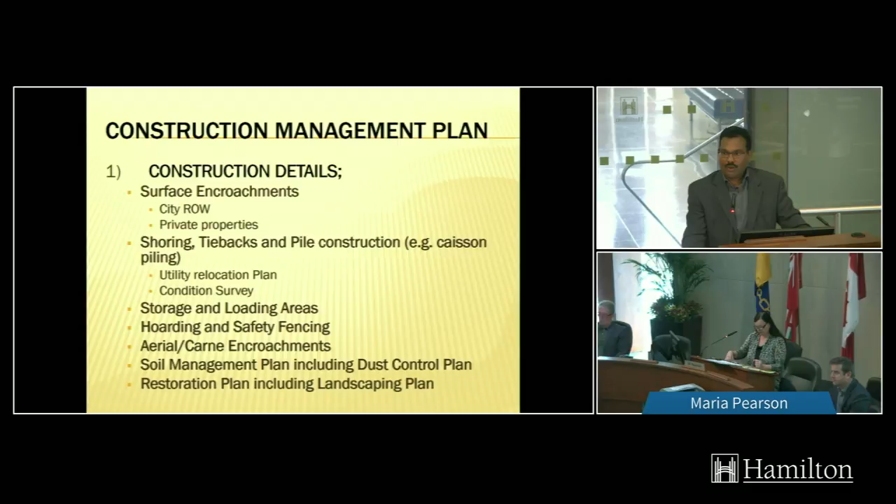Number one, the surface encroachment. What is meant by surface encroachment? There are two components we would like to discuss: one is the encroachment to city right-of-way, and secondly to the private properties.

Then I would like to present on the shoring, tiebacks, and pile construction - what is actually required for the applicant to submit to the city. Then we would like to talk about the storage and loading areas, hoarding and safety fencing, and we will discuss aerial and crane encroachments, soil management plan including dust control, and the restoration plan including landscaping plan.

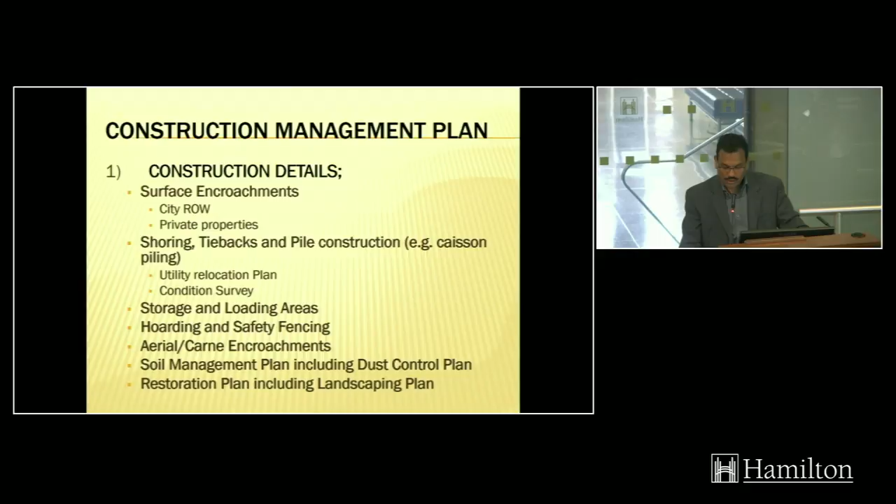So I just wanted to give an example of the surface encroachment. If you look at this map, you could see all three sides of this property surrounded by the city roads, and to the north and east side of the property, you can see there is private properties.

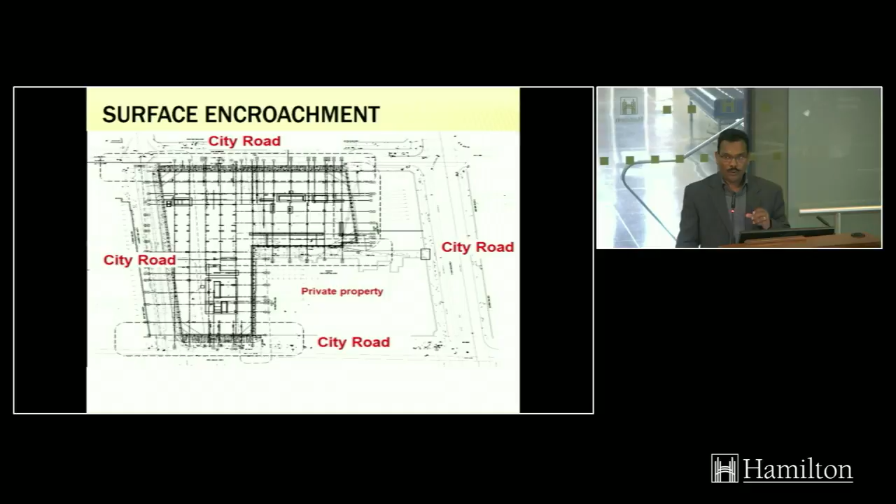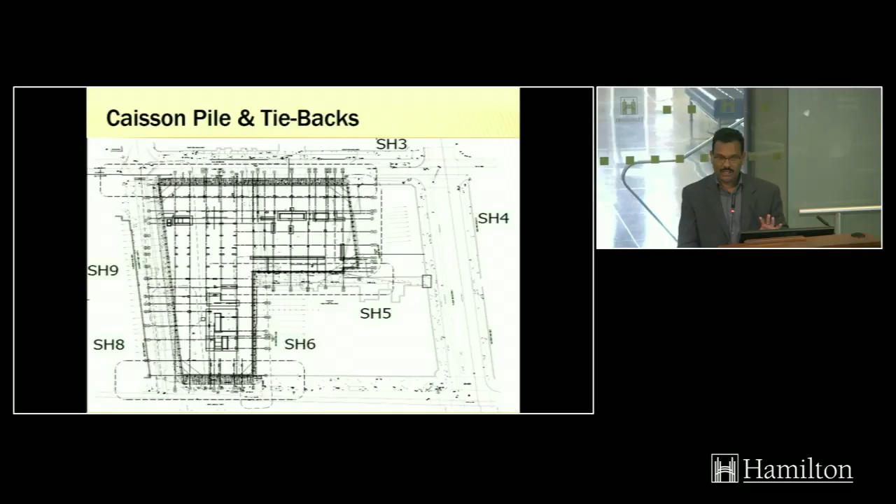So what we can see from this drawing, the applicant is proposing caisson walls, and also doing excavation within the city right-of-way. So in order for them to do the surface encroachment, I wanted to show you the next slide - the applicant has to submit a drawing with different cross sections, and they have to articulate how they are going to construct this building.

So if you look at this caisson, pile, and tiebacks for this particular project, you can see that the applicant is proposing to install a caisson wall. This is the caisson wall, and this is the foundation wall. They are proposing to have 4 levels of underground parking, and this is about a 25-story building.

Let's look at what is the impact and how we can address the impacts to the city right-of-way and the neighboring properties. If you look at this line, that is called the tiebacks - the applicant is proposing tiebacks to the city right-of-way and to the private properties. If you look at this block, that is the city infrastructure such as water, sanitary, storm, and so on, and the blue dots show the utilities within the right-of-way.

So we are asking the applicant to demonstrate - first of all, the city may not support the installation of the tiebacks within the right-of-way. They have to identify all the alternatives to see whether they can construct the building without impacting the city right-of-way. If there are no alternatives, they could come up with a design called shoring and tiebacks, and look at how they can implement this.

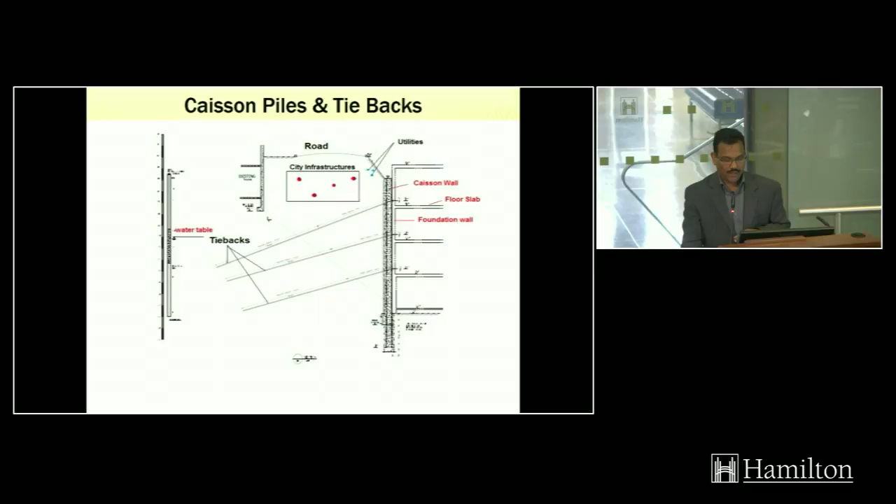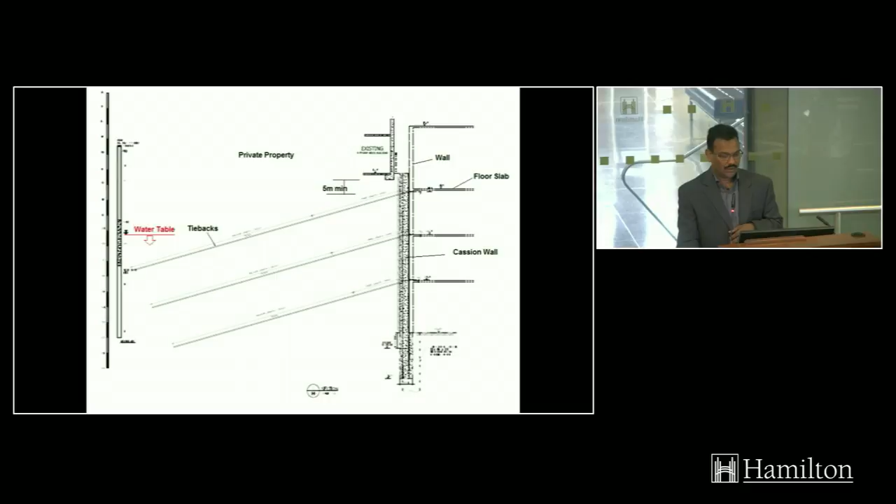One of the applications is also proposing tiebacks to private properties. You can see here, this is the existing building, and this is their foundation - they are going underneath the foundation with the tiebacks. So as a city, we are requesting the applicant to obtain approval from the neighboring property owners and a legal agreement with the property owners before they can do the tiebacks and have an impact on the private properties. So I just wanted to talk about what is meant by tiebacks.

Tiebacks are always used, if you look at major cities like New York, Boston, Toronto. In these major cities, land is precious, so developers want to take advantage of tiebacks to reduce the cost to construct the foundation and underground parking. So in order to do that, they propose the tiebacks first.

Before they start any construction, they install caisson walls all around the perimeter, and then they start excavating. One of the conditions for the city is a record of site condition. Without a proper shoring plan in place, they cannot do the excavation. So they have to come up with different types of shoring methods to support their construction.

If you look at this map, you can see the different types of shoring they can propose. For example, if this is a caisson wall or sheet pile, they are driving into the ground, and they have to drill a hole through the surrounding land. Then they install the steel and the grout, and tie with a thread to hold the tiebacks, holding the caisson wall or whatever method they are using. Technically speaking, they are just holding the caissons into the soil.

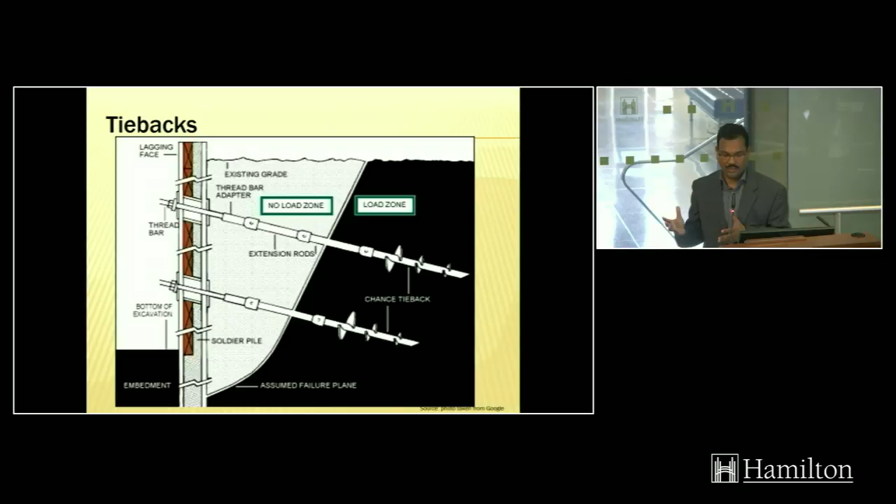Then the shoring and caisson piling, as I indicated, there are a couple of impacts. When they do the shoring, it may cause vibration to neighboring properties. So we are asking the applicant to submit a vibration analysis and a noise report. The city has a bylaw for noise, and they have to make sure they are not exceeding our bylaw - the dBA proposed in the noise bylaw.

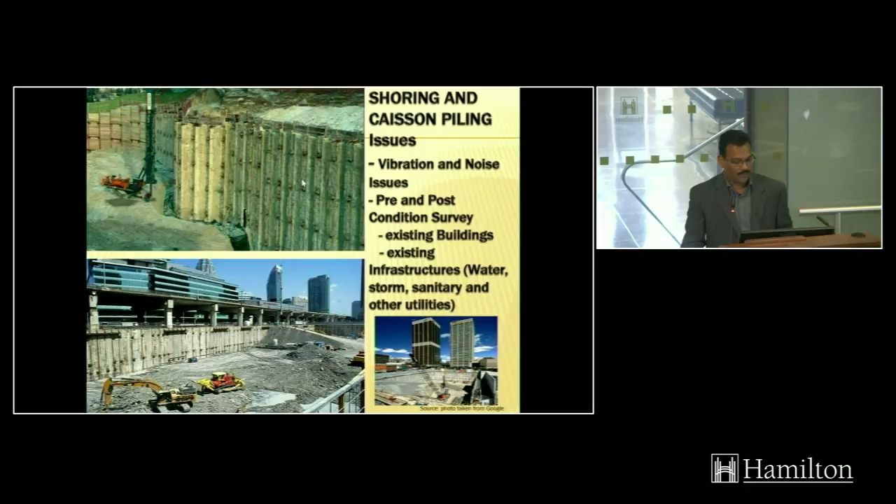Especially I wanted to talk about deep excavation and caisson piling. In this picture, you can see there are tiebacks to the neighboring properties, and this is a city road. They have the tiebacks, and especially they have to build a ramp to do the excavation within this pit.

It's very important that as a city, we have to make sure they have a mud mat in place or a washing bay in place within the access, so that the city street doesn't get dirty, and they have to continue street cleaning. No impact from dust migration is an issue, so that all has to be dealt with. Another component is to make sure there is no impact to the surrounding properties - the neighboring properties, especially the dust mitigation plan, has to be dealt with.

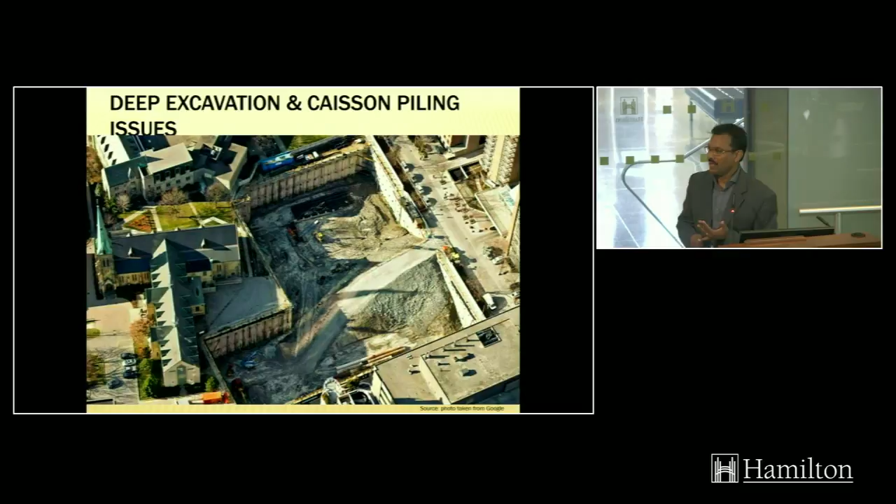That means all 4 sides of the property are going to be a caisson wall. They are trapping the water within that block, so that they can pump the water into the city system or somewhere they have to outlet. So in accordance with our policies, the developer has to submit a discharge permit. They have to get the discharge permit. If they are pumping more than 50,000 liters, they also have to get the ministry approvals. So that is one of the challenges in the process the developer has to undertake.

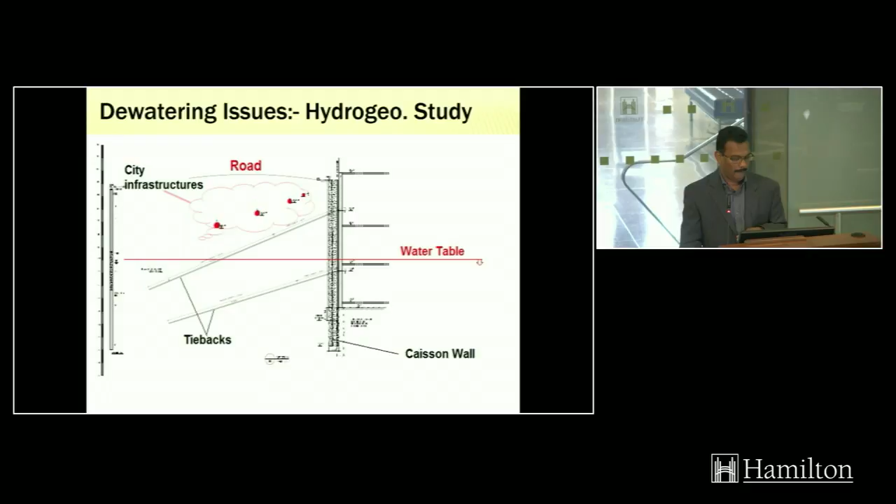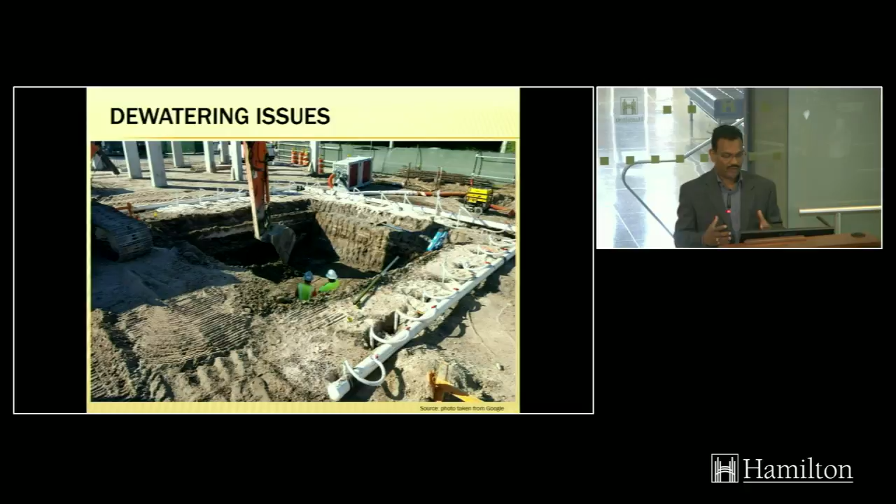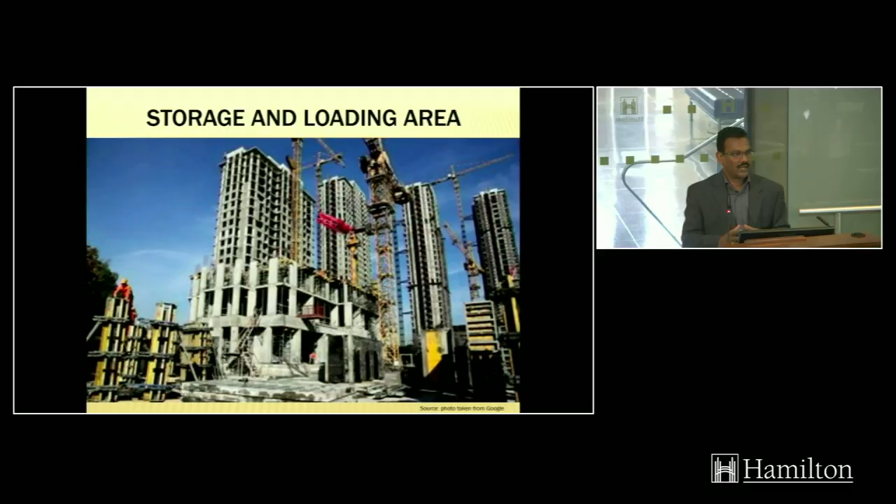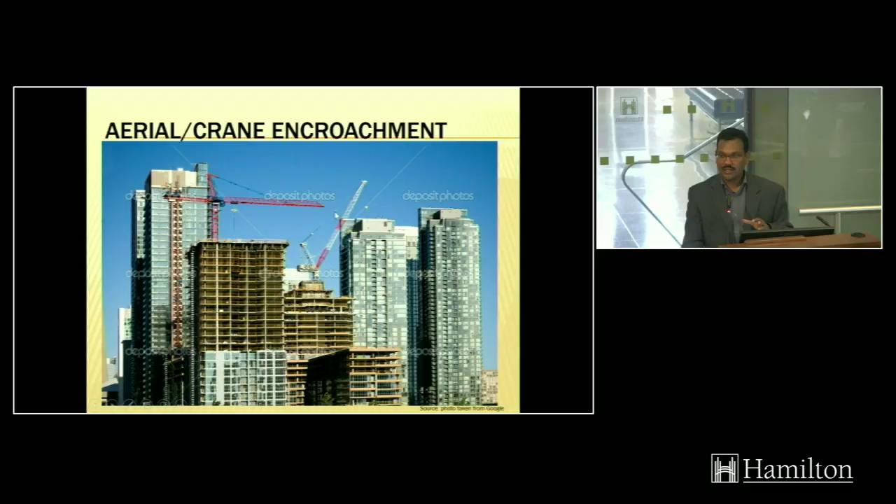to the city. So the next item I would like to talk about is the storage and loading area. You can see from this picture the whole site is completely occupied. So it's very difficult to identify the storage location within the site. So as part of the site plan process, as part of the construction management plan process, the applicant has to demonstrate to us where their storage and loading areas are going to be. And you can also see the cranes here. The buildings are very close, and they have to make sure they have the aerial rights and there is no impact to the surrounding properties.

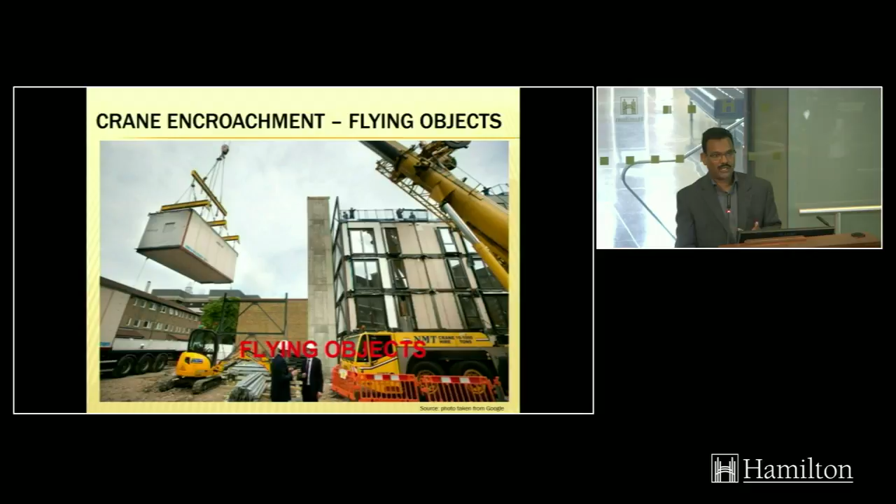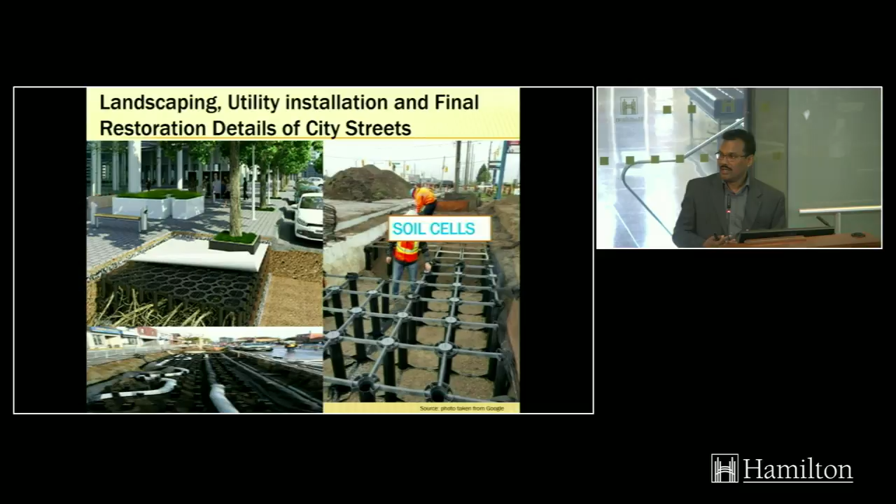And also, if they are flying heavy objects over the private properties or over the city road, we have to make sure there is no impact to the public. In some instances, the developers are also proposing soil cells. Especially within the city environment, the trees are very nice, and it matters how they are planted. So in some instances, they are proposing the soil cells. As we all know, it is very important that the utilities are within the boulevard. So when they place the soil cells, we have to make sure that all the utilities, especially on this side, you can see all the utilities are going inside the soil cells. So there is a lot of coordination required. Various departments in the city are working together to implement everything required to support the development.

So the next major component I would like to discuss is the traffic management plan. As part of the traffic management plan, one of the important aspects for the development is they have to demonstrate where they're going to access the site. They also have to provide the detour plans. They have to make sure there are no neighborhood impacts. The pedestrian movements have to be taken into account in the traffic management plan. Then there are several city projects going on. So the developer has to make sure there is no impact to our businesses and the residents. Then especially when they are relocating the sidewalks, they have to make sure they are properly designed so that the street lights and everything can be provided so it can be a safe passage.

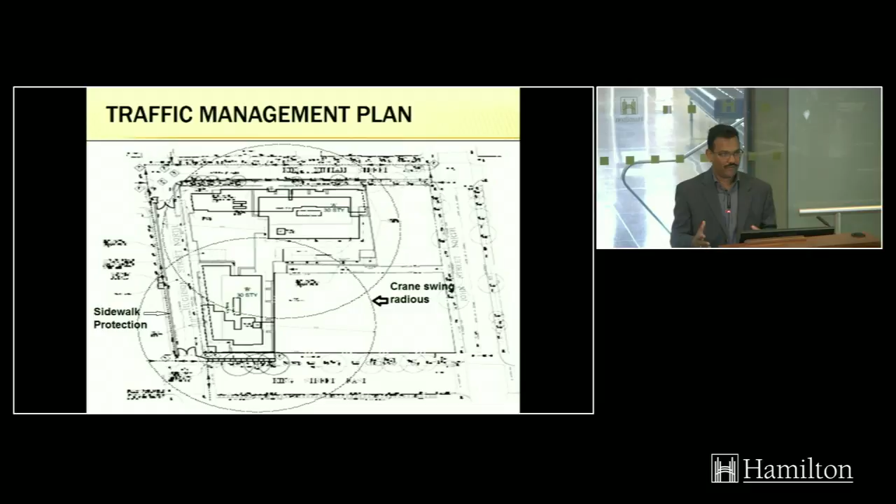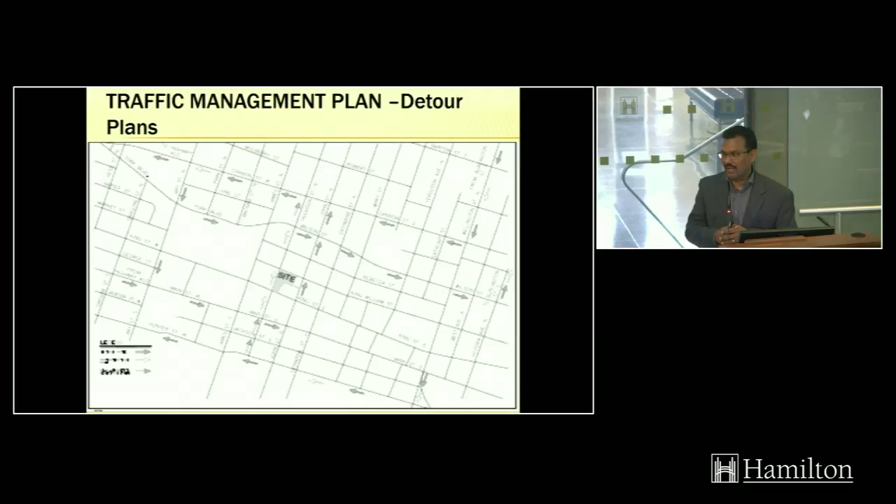So as I indicated earlier, if you look at this map, I'm sorry for the clarity of the map, but the main intent is to show that there is lots of construction going on within the city, and we have only certain arterial roads. So we need to make sure that we're coordinating all the road closures and all the traffic movements, heavy truck routes, and all the components that can be managed through this traffic management plan and detour plans.

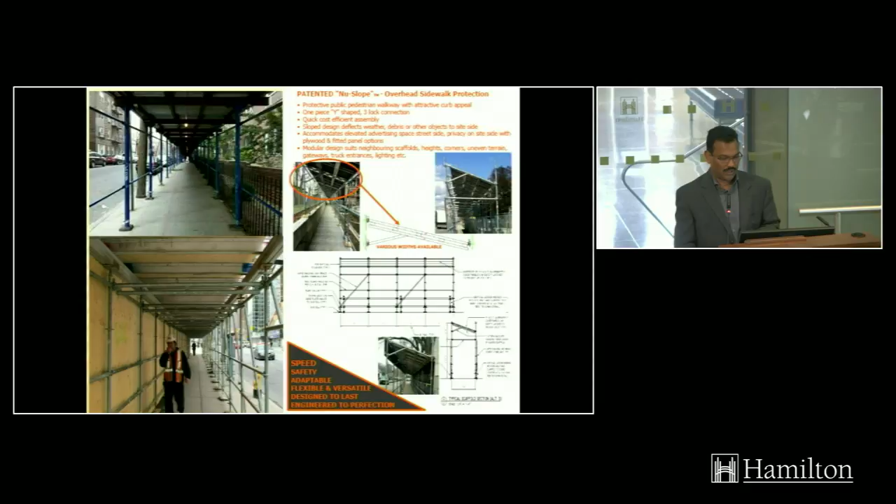And especially if you are closing the sidewalk or protecting the sidewalks, we have to make sure there is an overhead sidewalk protection if it's required, and that has to be certified by an engineer so that the public can safely walk through this overhead protection. Overhead protection.

So the next major thing I would like to talk about is the communication plan. It is very important that the ward councillor be informed what is going on within that area so that they can understand, they can facilitate, and when they get calls from the residents they can answer. So as part of the construction management plan, we are asking the developer to provide the details and consult with the ward councillor. Then they also have to send the notification to the business community and the residents.

We are also requesting them, prior to the start of any construction, to set up a pre-construction meeting so that our construction section can be on top of all the issues. Then send notification to emergency response, fire, police, ambulance, and transit. And also we are requesting the developers to build a website so that everyone can go and see the construction staging and the current news with regards to the development.

Then the working hours: we always have working hours as per the city standards. But if there is any difference in the working hours, they have to inform us. And at last, they have to make sure they provide a detailed construction schedule so that we understand and we can answer the questions from the public and the councillors appropriately.

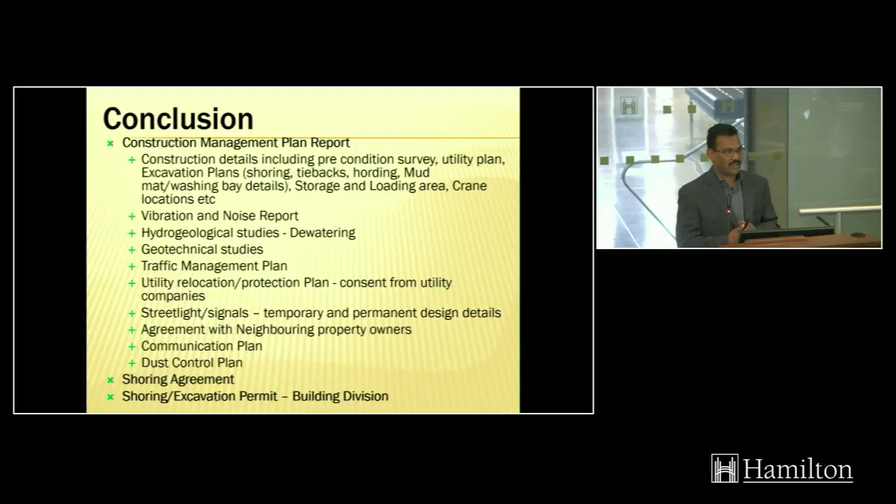The traffic management plan we talked about provides a comprehensive plan of how the traffic can move and how the traffic plan can be adjusted to accommodate this development. Then the utility relocation: if they are impacting the street lights or any utilities, they have to make sure they provide the utility and protection plans. So in the end, with all of this, they have to enter into a shoring agreement so that we have the letter of credit and the insurance so that the development can proceed smoothly.

So that's all in my presentation. Any questions? Venu, thank you. That was excellent. It certainly gave an awful lot of information in a few slides on what staff have to deal with, with the development industry out there. I do have a speakers list. Questions? Councillor Farr?

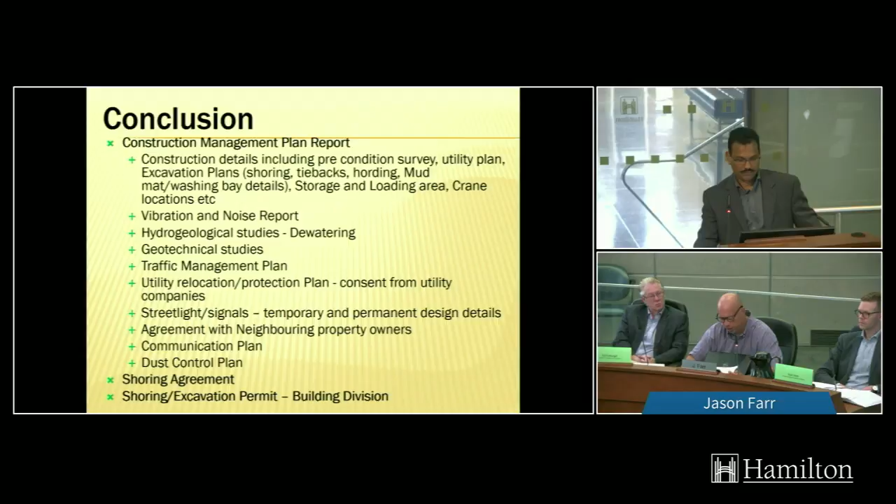Thank you, Venu, through you, Chair, to the construction management plan slide. Sorry, not that one, just about six slides back. The traffic management slide, sorry. So you talked a lot about pedestrians, and I've taken a bit of heat when we have major developments happening and we close a sidewalk. I take heat and staff take heat. We would love, for each and every development, to maintain the sidewalks on both sides of the street, and it hasn't always been the case. I think we're better at it now. I think we can get better at it, but folks don't know the effort because it just sort of happens.

Platinum at the corner of King and Queen, for example, might have had a sidewalk closure. We even did pedestrian counts at peak periods. It was something like 16 people using that sidewalk. We could have closed it, but instead, thanks to people engaging in the community, we fought in the construction management plan to keep it open. And that's the first time publicly people have learned that. We could have gone the other way. So it's incumbent upon us, as you rightly note, to do our very best on the sidewalks.

But you haven't mentioned cycling at all. So where in the construction management plan are we, especially if it's along a bike lane? How is that a part of the process in the construction management plan, through you, Chair?

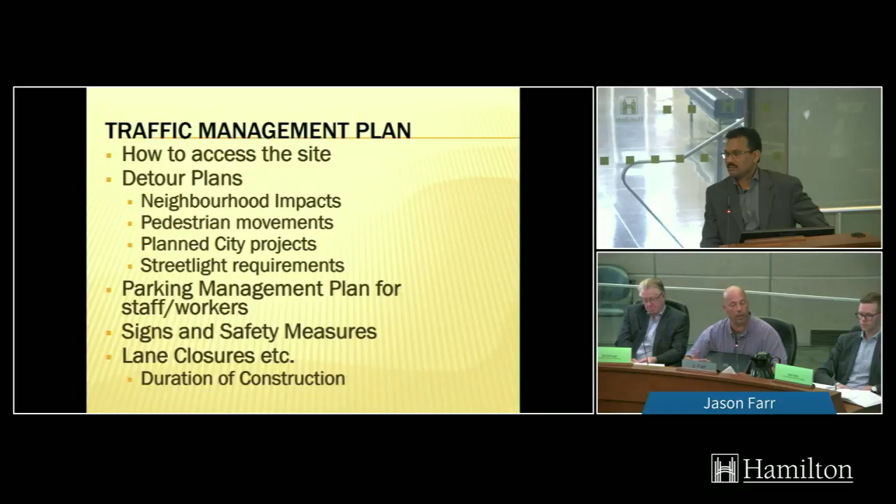As part of the, if you look at this drawing, as part of the overall traffic management plan, Public Works is looking at the cycling and the sidewalk closures. So they will make sure that all the cycling and the sidewalk analysis is done, and they will be appropriately directed to address that issue.

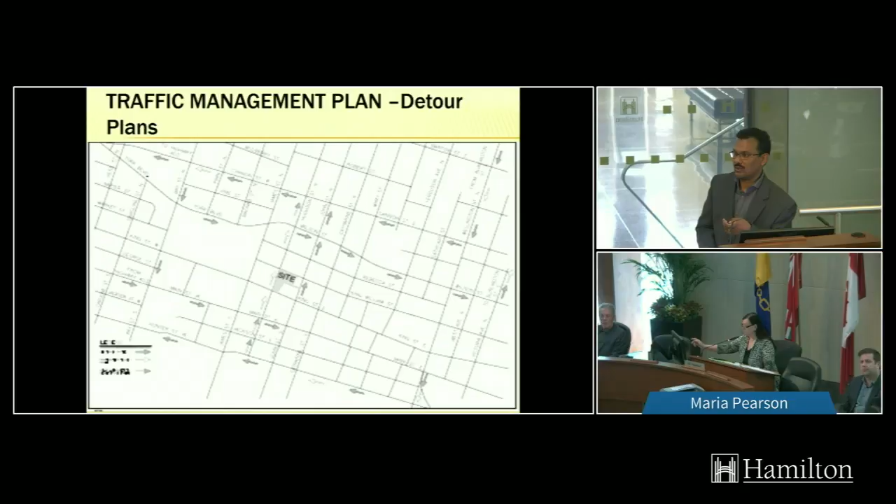So Tony has something to add. Councillor Vanderbeek. Didn't I? No? Okay, there you go. Thank you. Go ahead, Tony.

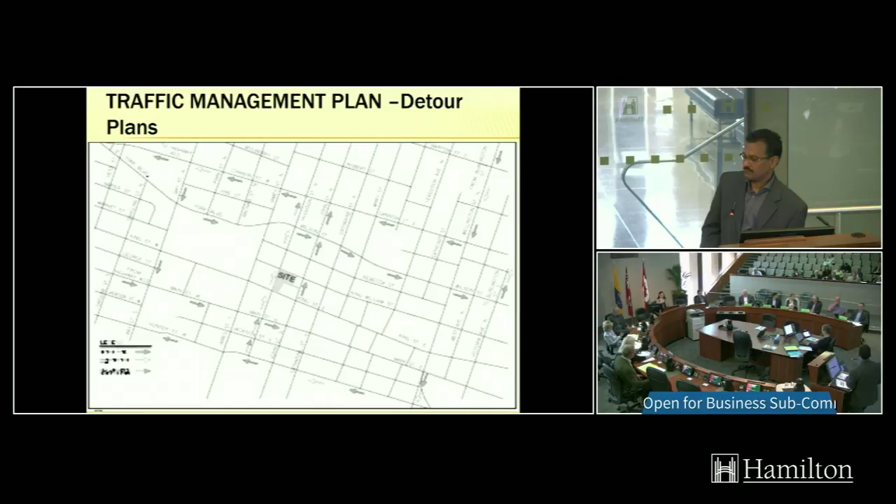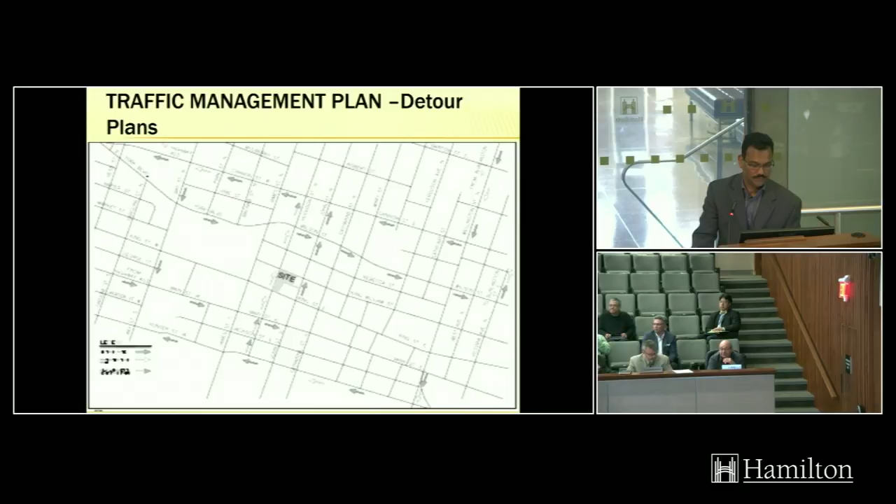Thank you, Madam Chair. Through the councillor, it's a great question. When they review these traffic management plans, it's for all modes of traffic. Binu didn't mention HSR is a big issue as we have to deal with it because the detours can be extensive. So they are looking at that. One previous project, concerns came up on Cannon Street in terms of the use of the bike lanes. And we made exerted efforts for the developer to maintain access to those facilities during the duration of the construction.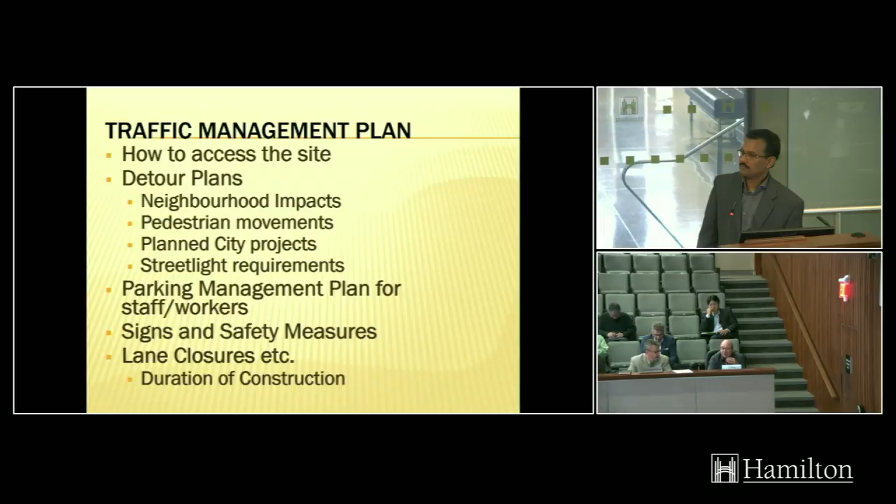So where you can, you want to try to maintain all those public elements as being the first line of our position. And then we have to look at the details as to the impacts and where we can compromise and where we can't. Thank you, Tony. The other question was on this dewatering. Can you go to that slide, please, Binu? And then this is it for me.

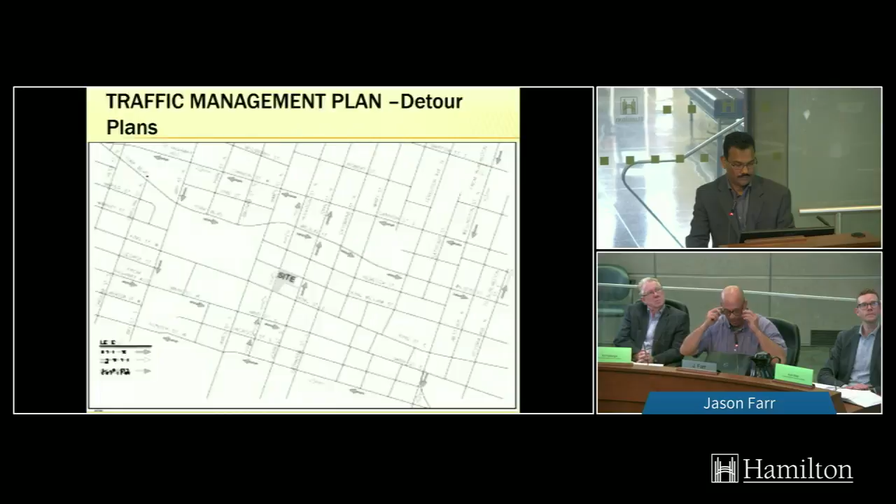So I'm dealing in the older part of the city. We're getting these massive developments, and we're all happy for the jobs they create and the residents they bring and the vitality and so forth. But we're also dealing with combined sewer systems, Binu. So through you, Chair, you had touched on it here. It's the requirement of the proponent who's feeding into a combined sewer, storm and sanitary, they have to have 2 separate pipes, but if those 2 separate pipes are going into a combined, why can't the development also have a combined? Through you, Chair.

Through you, Madam Chair. So the main component is first they had to identify how many liters per second they're going to discharge. Our combined sewer system has a limited capacity. So whatever we assigned to this development, they can discharge into the system. So normally they pump the water from the ground. It has silt, so it goes to a tank. They control it within the tank, and then they discharge to the combined sewer. So we are only concerned about how many liters per second they are discharging into the system. So it all depends on, through you, Chair, what the system is on our right-of-way. Correct. What system can take the capacity, that's all.

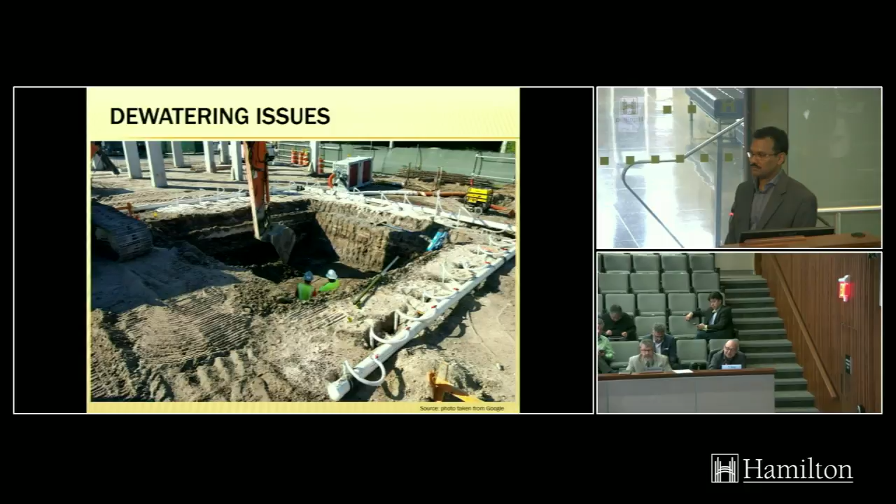I understand that. In the older parts of the city, though, Tony, you'll admit, through you, Chair, there are unique challenges. Through the chair to the councillor, unique is a very nice way of putting it, yes. Why not in a case? You know what? I'm not gonna. I'm getting parochial, and I don't want to do that, and I want to keep the meeting moving.

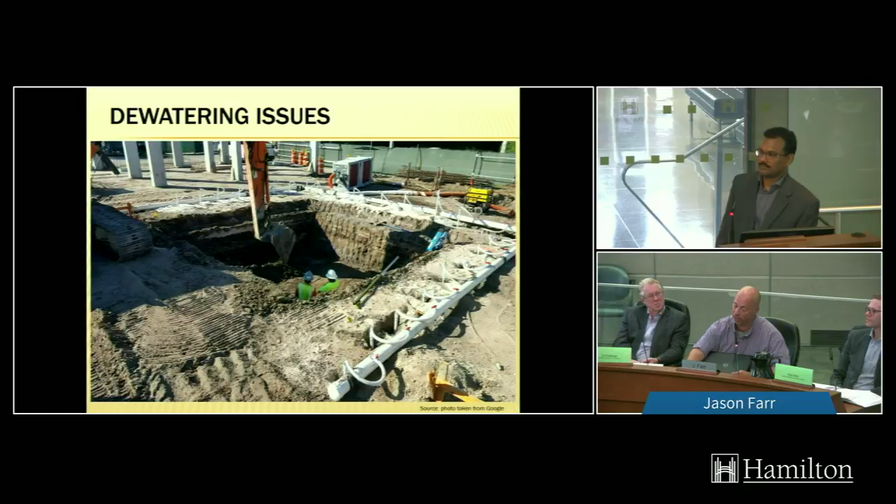This is the dilemma I'm in on one stretch, but it's not for this committee, but I appreciate it, and I did want to get on the record that we do have these unique challenges in the older parts of the city that I think we still need, it's a work in progress as far as I'm concerned. Thank you.

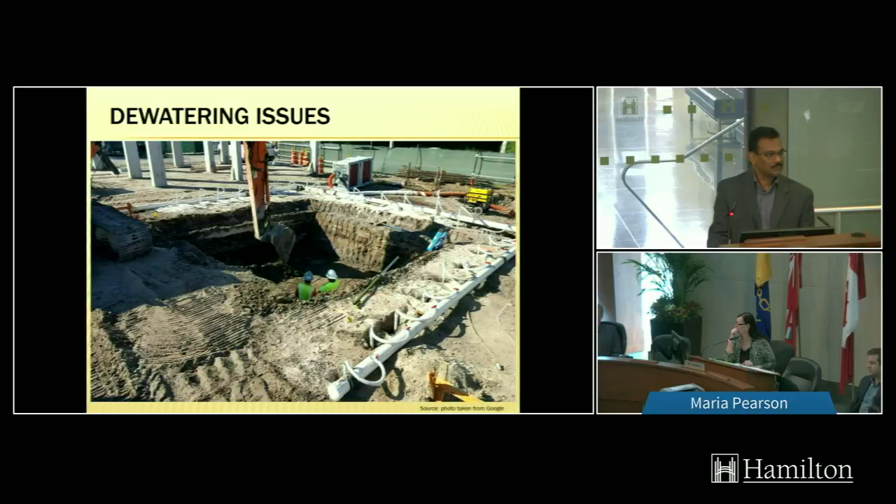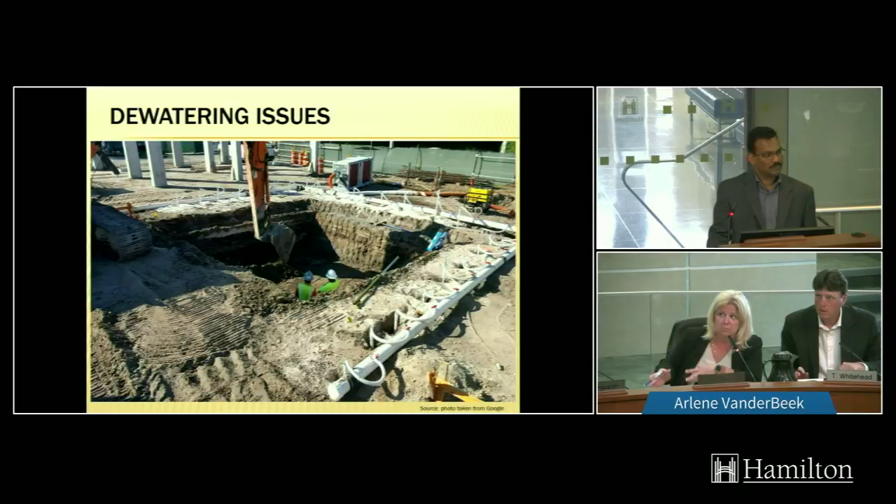Thank you, Madam Chair. Binu, thank you very much for this presentation. It's obviously a very complex process to walk people through this for these major projects. My questions are around the shoring. My first question is, what is the benchmark for this shoring with tiebacks? I mean, in my experience, we've had everything from no shoring to major shoring. So if you can tell me what the benchmark is for this kind of shoring, I'd appreciate it.

Sorry, through you, Madam Chair, as I indicated earlier, Councillor, as a city, we don't like to see any shoring within the city right-of-way. But in some instances, the applicants are proposing to have the shoring and tiebacks, especially if they are going deeper, they have to support their shoring wall. That is why they are proposing the tiebacks. If there are options, one, they cannot build the building right to the property line. They need to have additional lands provided to do the shoring.

So one of the ways other municipalities are also approving, they are allowing the tiebacks. The tiebacks are basically an instrument to hold the caisson wall. Once the tiebacks are installed, we are asking them to de-stress the tiebacks. If you look at this map, this is the key holding this wall, the tiebacks. As soon as you de-stress, the next development comes on the side, or even the city goes back and does the reconstruction of the road, we can cut these ties. It's not going to be an issue as long as they de-stress.

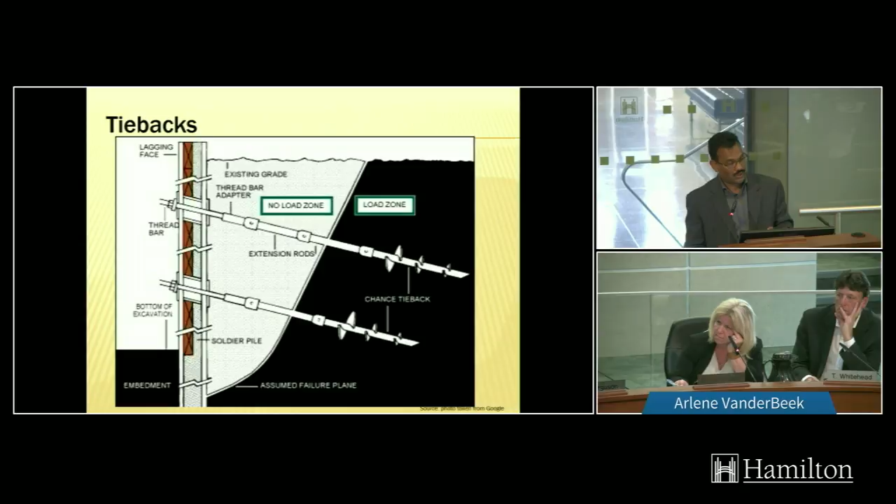Thank you. And so through you, Madam Chair, do these tiebacks stay in the ground? Are they there permanently? Yes, they're going to stay in the ground permanently. But as long as the other developer comes and builds, so in this case, I just want to go back to one slide here.

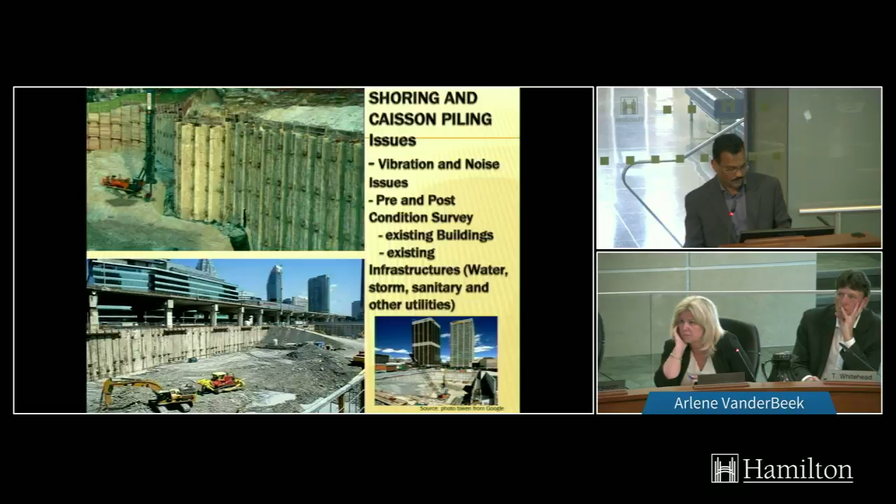So you can see the existing building - the tiebacks are actually going underneath the building. For example, this developer, this private property owner came back and wanted to now go 5 or 6 stories underground. This developer actually has to make sure he de-stresses the tiebacks so that this property owner can cut these ties and rebuild. So there are no major implications.

We are allowing the tiebacks, but the only thing is we have to make sure they have the appropriate agreement between both parties. And as a city, we need to make sure that the tiebacks are designed appropriately so that it's not going to have an impact on the existing property owners. That is entirely on the developer to make sure there are no vibrations or cracks within the existing building. That is their responsibility to make sure there are no impacts.

So thank you. So through you, Madam Chair, I just want to go back to my original question because I'm not sure you actually answered it, which was, what's the benchmark for this type of shoring? Is it the height of the building? Is it the depth they're going? Is it the proximity to infrastructure or a neighboring building?

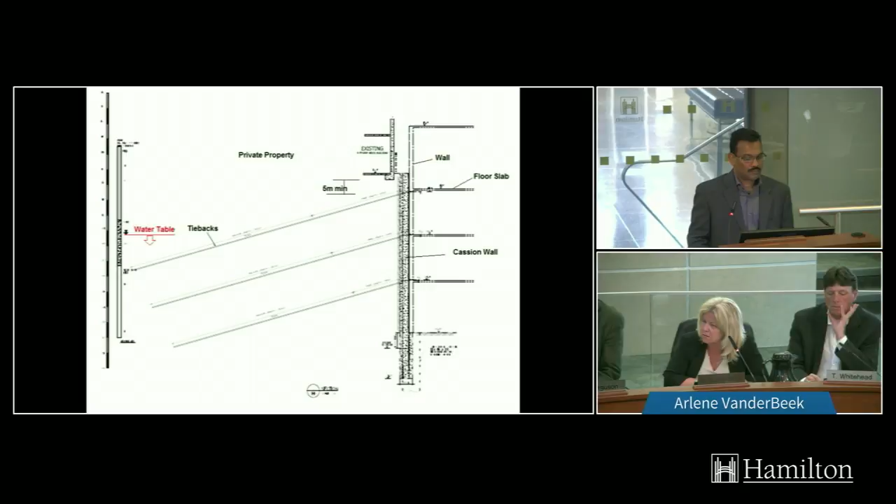At what point would you insist on shoring with these tiebacks? Normally, if they are building the properties right to the property line, and also if they are going deeper, say probably 2 or 3 stories underground parking, they may need the tiebacks. Because if you look at this drawing, you can see that the deepest infrastructure within the road is the sanitary sewer, that is probably about 6 meters. So we are recommending a minimum of 3 meters below where the tiebacks have to be. So that means it's about 9 meters at a 30-degree angle.

So normally, if the excavations are about 5 to 6 meters, roughly they need the tiebacks. So that is the threshold. Second thing is, if they are coming very close to the neighboring properties, that may have an impact. If they have multiple stories underground, then they cannot use rakers. One way they can use is they can hold with the rakers inside, but that is only for probably about 1 story underground parking.

Thank you. If I have other questions, I'll carry on with it offline, but I was just interested in the general question of when do you use them and what happens to them. So you've answered that. Thank you.

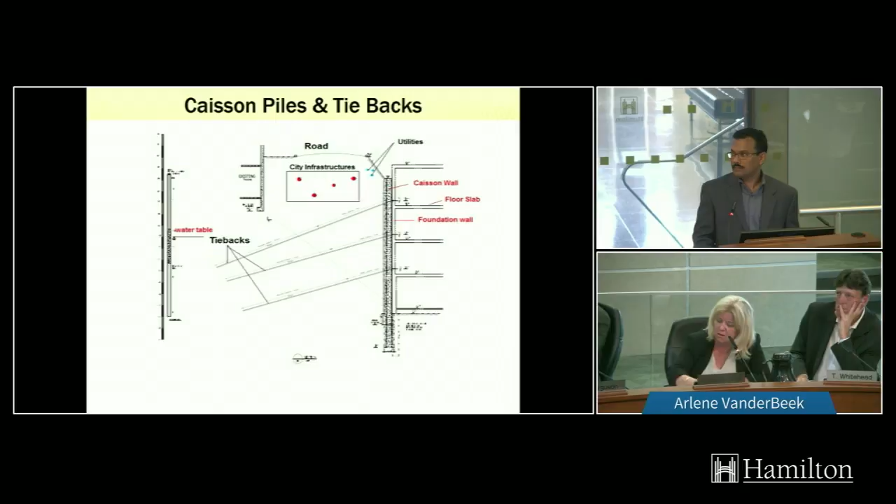Yeah, thank you. There seems to be getting a lot of attention these days around shoring, certainly with the building on King Street at Queen and another one down on King William and King. H-beams and lagging, sheet piling, and caisson retaining walls have been around for decades and have been tried, tested, and true. Why is this suddenly a big issue when we've been doing this stuff for 50 years?

So at the moment, we are asking for the developer, if they are encroaching into the city right-of-way, we would like to know what they are installing and how they are installing it. Especially, we have to make sure - I'm not sure previously how they did the foundation works. At the moment, I can see in the drawings that they are proposing the tiebacks. They may be using different types of mechanisms to construct the excavations. So at the moment, they are proposing the tiebacks, and the tiebacks have an impact on the city right-of-way, and also on the private properties.

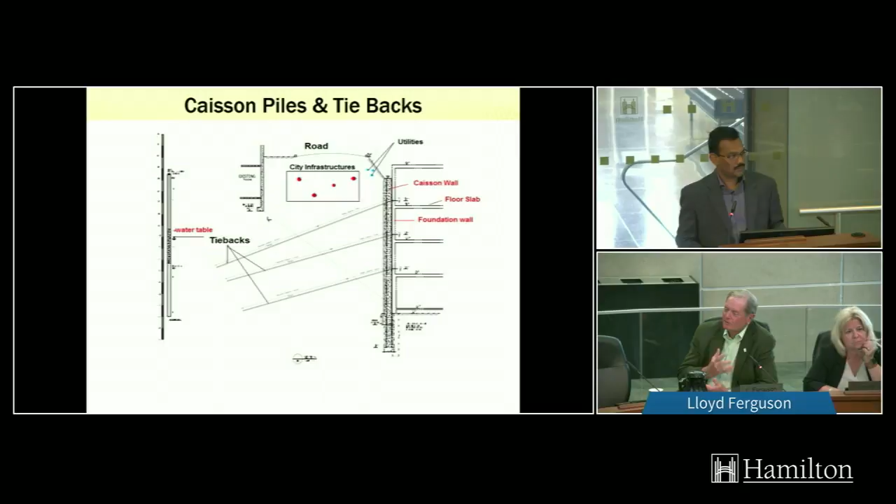But you've had to use tiebacks for decades. Once you get below 4 meters, say, depending on the soil conditions and proximity to another building or the road - is there a change to the Ontario Building Code to require permits for shoring now that we didn't have before? I'm just wondering why this has suddenly become a big issue when we've been doing it for decades.

I'll refer to Mr. VanderWindt. Ed? Through the chair to the councillor, just a little bit of background on the building code portion.

This structure is actually called an excavation in soil rock retaining structure. It's been in the code since 1986 - it's been there for a long time, and it's under the building code. Typically, buildings in our downtown have gone down 1 story, and we are into a new era. We're digging now 2, 3, 4 stories below grade, and that's when these tiebacks really kick in.

So it's somewhat new to Hamilton. We've seen some before, but now we're getting them on a regular basis because people are building out to the property line, which is right against the sidewalk on the street. This is initiated by the city, not by the Ontario Building Code, because in Toronto they've been doing this type of shoring for a long time.

Yes, so the building code has always required permits for these structures. And just to help out with Councillor VanderBeek's comment earlier, what triggers this?

When there's an investigation done on the soils for a property, I'll give you some of the parameters they look for: the subsurface investigation, the depth of the foundation, the sloping ground, eccentric and incline loads, dynamic loading, hydrostatic uplift, groundwater level change, swelling and shrinking soils, expanding and deteriorating rock, construction on fill, and the actual structural design of the shoring itself.

There's a number of parameters in that structure that need to be looked at to prevent the neighboring building or street from collapsing. It's not just as simple as a certain height. But aside from that, any retaining wall over 1 meter in height requires a design under the building code.

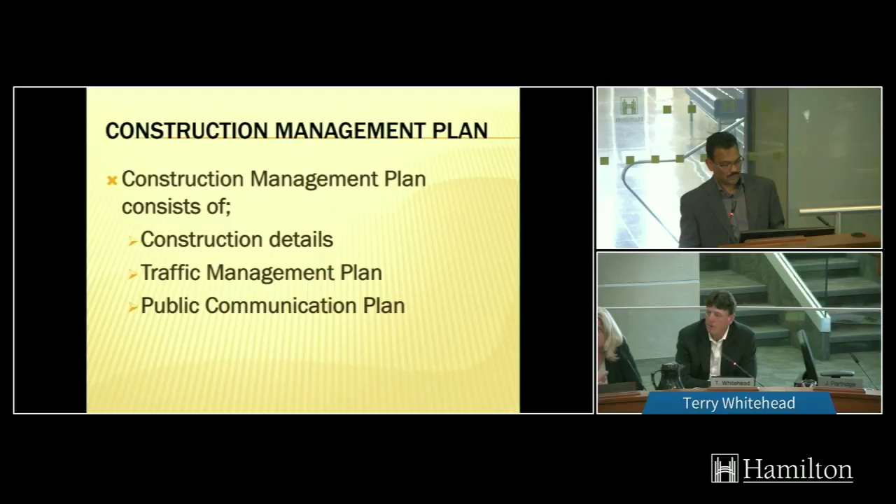Okay, but I mean, you're not going to have a 2-foot tieback because it's not going to do anything. So there's got to be some formula or ratio relative to the size of the wall, soil conditions, and depth that would determine the length. So I'm just trying to understand what the range would be.

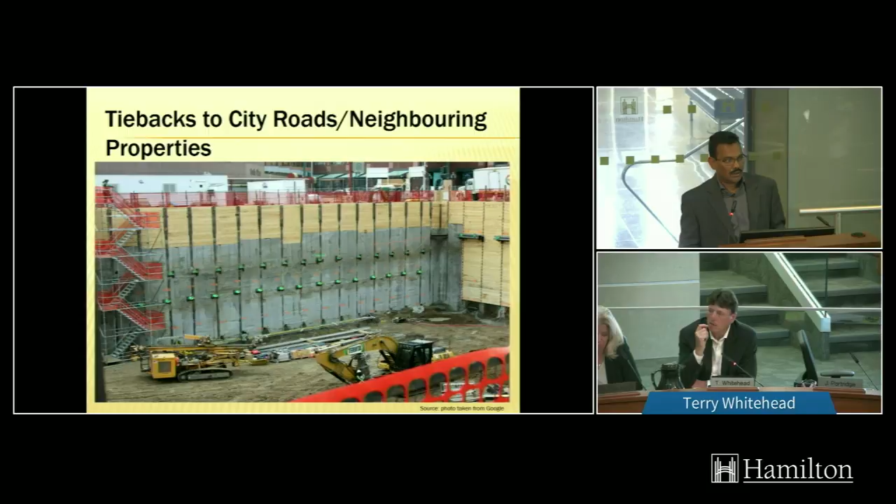What would the range be typically for these tiebacks as far as length? Typically, I see about from 7 meters to 14 meters.

And what angle do they usually go at from the wall normally? 30-degree angle.

So these are the tiebacks actually in this particular case. What they did, they installed the piles, then they have the tiebacks. These are the wood lagging. So basically, first they install all the caisson wall around the perimeter, then they start excavating it. As soon as they reach certain levels, they start the tiebacks. That's the way they can excavate.

As you said, it's a temporary measure to do the excavation. It reminds me of underground mining when they call it rock bolting. They had 16-foot rock bolts to help stabilize the surface. So this is just stabilizing the wall.

So then clearly after it's built out, that's why you can de-stress the tiebacks because they're no longer relevant at that point. Correct. So in this case, if you look at this map, this is the wall they put in place. Plus, when they bring the foundation wall, they de-stress each tieback. So it's easy to do that.

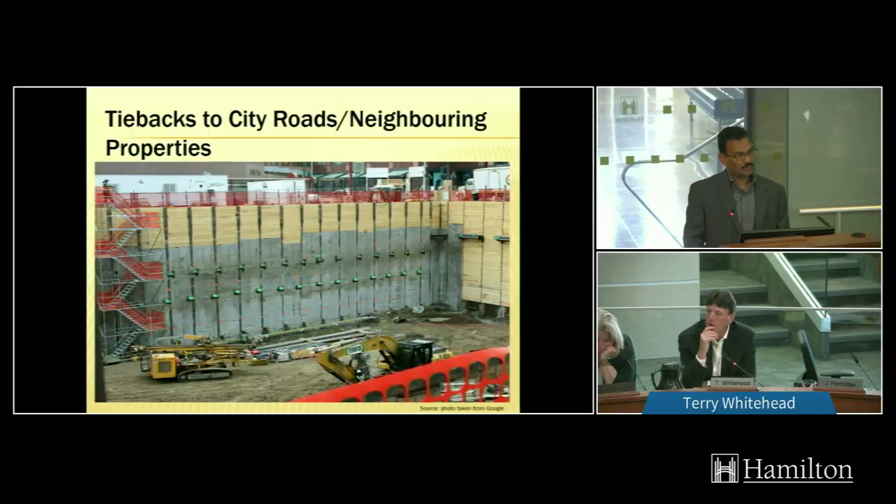Now, is it automatically assumed then that in all these situations, relative to the depth, the tiebacks are always going to be below all our infrastructure, like water, sewer, utilities? Always automatically below those infrastructures?

Yes, as part of the engineering review process, we are asking them to delineate all the utilities and city infrastructures. Based on that, we are asking they have to go a minimum of 3 meters below the lowest infrastructure within the road.

Okay, so what is the typical depth that the first tieback would be required? That all depends on the structural design. What I've seen in the engineering drawings is probably about 3 to 4 meters deep.

The first tieback at a 30-degree angle comes in. So I would say, earlier I said 5 to 6 meters. That's a typical depth.

Is it safe to assume then that the majority of the needs for the tiebacks, when you see these plans come in, would not be undermining the integrity of our infrastructure issues because they're well below that depth?

That's correct, Councillor. As part of the process, we are also asking the developer to do a CCTV on the infrastructure. That is the precondition survey for the road, above ground and underground. As soon as they complete all the work, we ask them to do a post-condition survey to make sure there are no cracks, no impact to our infrastructure.

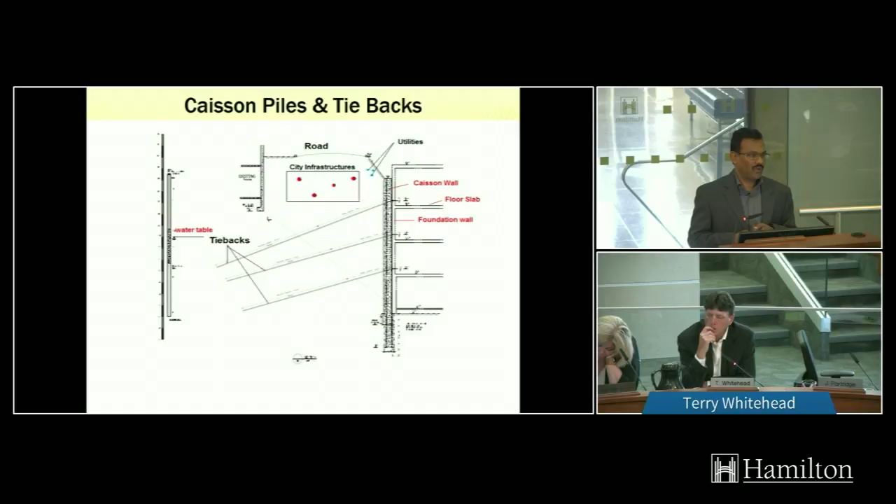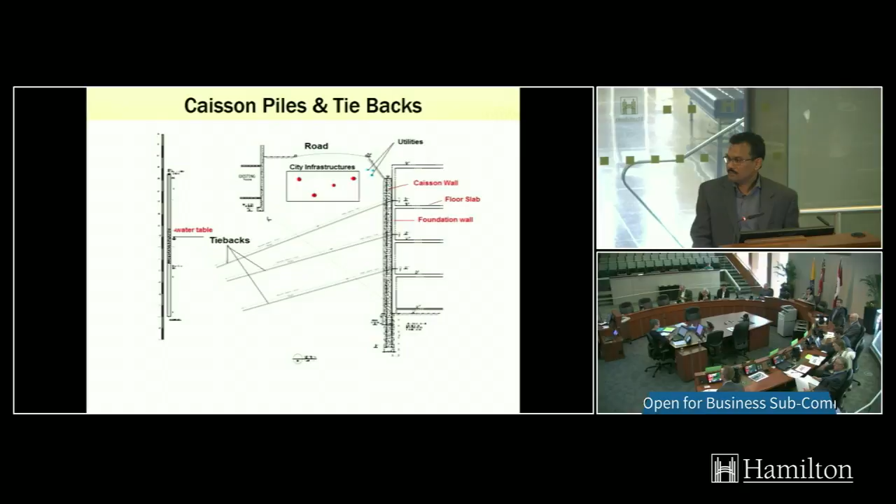Through you, Madam Chair. Binu, could you just clarify where in the approvals process the construction management plan comes in, with respect to site plan approval, building permit, and any approval timelines associated with it?

It's a very good question. Through you, Madam Chair, the first part in any development approval process is the site plan conditional approval. As part of the conditional approval, there's a condition the developer has to undertake. At the moment, if you look at the site plan conditions, this is basically prior to applying for the building permit, they have to provide foundation drawings to the engineering section to circulate to different departments so we understand the impacts, what are the impacts to the right-of-way, neighboring properties, and so on. So basically prior to applying for the building permit.

From the point of view of us as architects, there's a bit of a challenge with submitting that prior to building permit application. I can understand prior to building permit issuance it has to be sorted out, but for the life of the project, at site plan approval it's asking projects to jump quite far ahead to get the foundations completely sorted out at a fairly premature stage. Do you see any ability for that to be shifted to be a condition prior to building permit issuance?

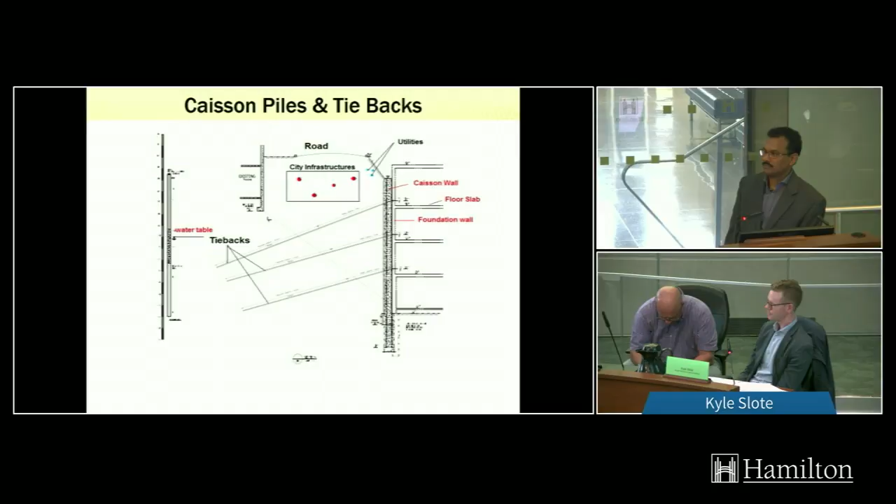Traditionally, any work on the site requires site plan approval, and that takes time. This process took the shoring permit out of that process and allowed us to do that before site plan approval, helping the industry move ahead with site works on the property without going through the entire site plan approval process. Although it may appear like a new thing, it was actually done to help expedite the site work prior to the site plan approval process being completed.

Okay. Thank you. Okay, thank you.

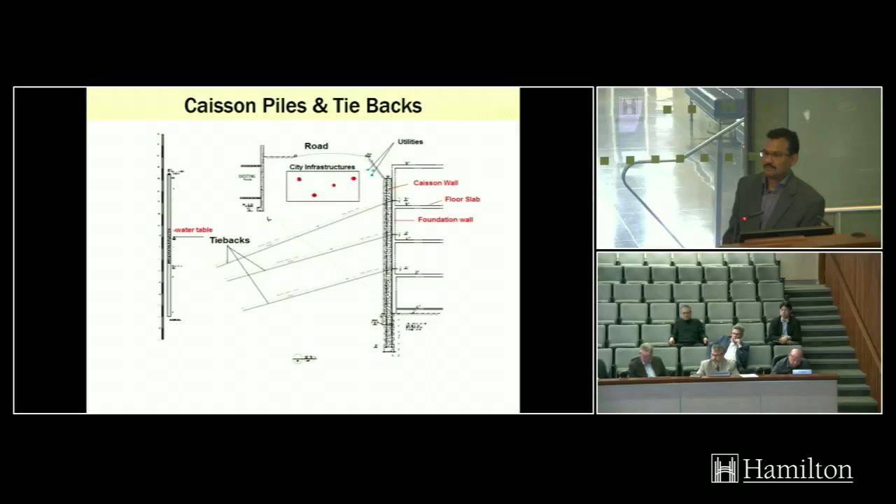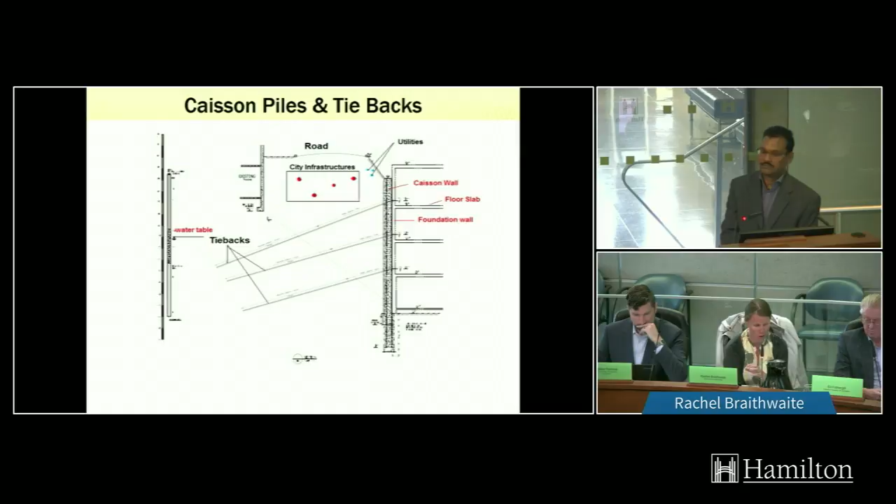Rachel: Thank you for your presentation, it was very informative. Just a couple quick questions, hopefully. My first was a comment actually. The soil cells, I really appreciate you including that. I've heard great things about them, and I think it's really required to mitigate the stresses from the reduction in stormwater management.

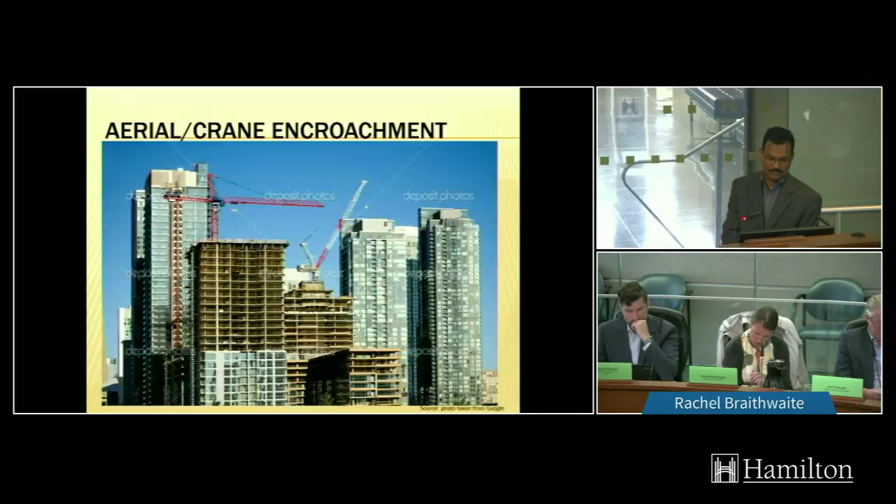So my questions are, is this for all new builds? Is the construction management plan only for those builds that need shoring, or is it for all new builds? And do we have estimates of the cost and time implications for developers?

So the construction management plan, as I indicated, has three components: construction details, a traffic management plan, and a communication plan. The traffic management plan is actually required for any construction that is cleared by the Public Works Department. That is a requirement at the moment.

Then we are looking at the communication plan. This is important because we have to inform our ward councillor, and secondly, we need to inform the businesses surrounding that development. We don't need this for all developments, but especially if you are impacting the city right-of-way and neighboring properties, we need to make sure we're entering into a shoring agreement to reduce impacts, and the commitment between the city and the developer has to be highlighted in the agreement. Tony actually wanted to add, I believe.

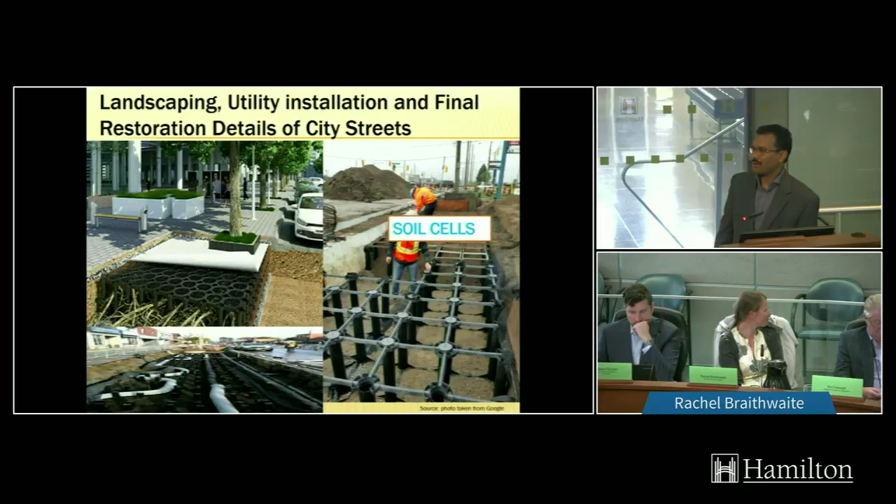Through the chair to the question: the short answer is, it depends on the scale and the scope. Where you have a lot of site plans coming through for blocks within a development, most of the stuff has already been covered through the original development approvals, so you look at everything realistically.

Where you have confined spots with a lot of activity, we have a lot of concerns raised as part of any planning approval, especially related to vibration to existing heritage buildings. When the approvals were done for the former Connolly building, the historic church next door came in, and so we want to make sure we put various conditions in place for the situation that comes forward. A lot of these are private matters as it relates to the applicant; we're more concerned about the public realm, public safety, and the impacts around the adjacent area.

So in the case of downtown, you could have multiple projects going concurrently along with city projects. You need a traffic management plan, and you need to understand the duration. Noise and dust is always going to be an issue, and they're covered by the Ministry of the Environment as well. We just want to make sure everybody's front and center on those. And the restoration, if you encroach within the public realm, that's covered, and we look at it very holistically. So each case may be more comprehensive, and some may not.

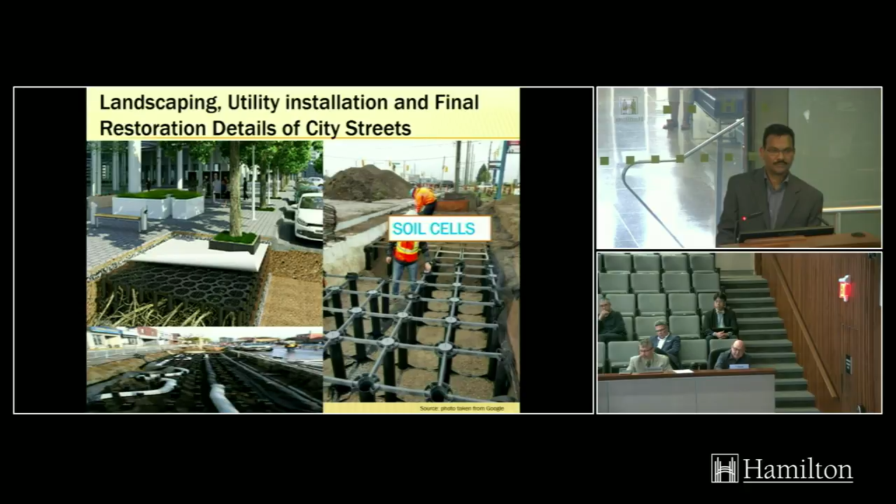Matt Johnston: No questions, just a comment I wanted to relay and to commend Tony and Ed on their hard work on this. This was a good example of how the Development Industry Liaison Group and city staff have been working together over the years. This is not the first time this presentation has been made, and it was one where I think we were both learning from each other in terms of what the issues are at play. The end result is a good way to concisely formalize something that needs to be done, and it really is a good example of how the groups can work well together to get to points like this. So thank you.

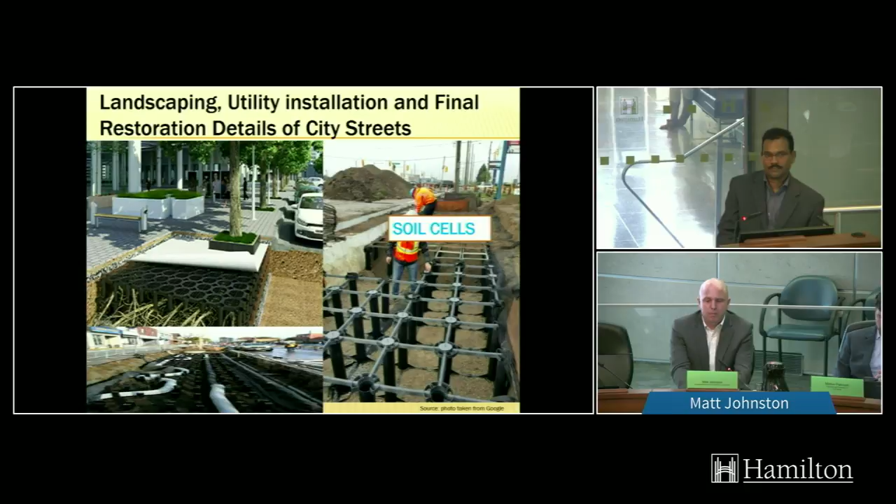Thank you, Matt. With that, may I please have a motion to receive the presentation by Binu? Excellent, again moved by Councillor Whitehead, second by Councillor Vanderbeek. All in favor? Carried. And before we close, I'm just going to turn back to Kyle.

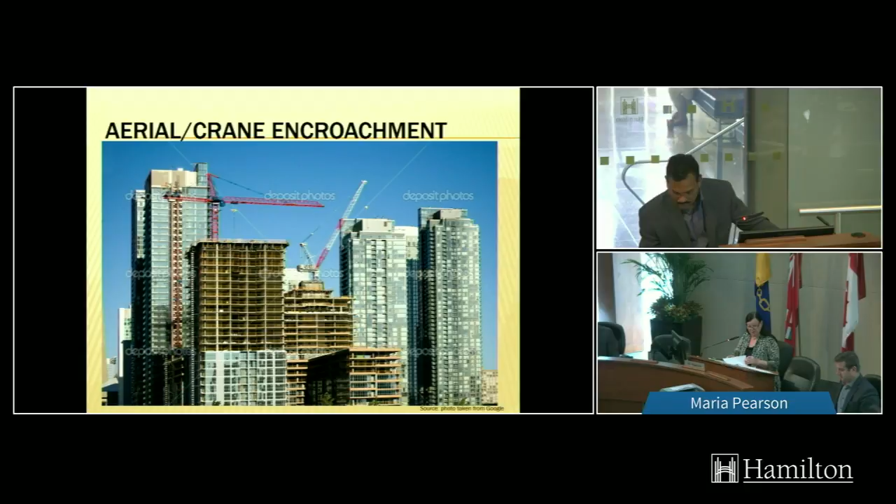You had your correspondence item 5.1. You want to make a comment, if I'm correct? So please go ahead. This is the item we received today from the Hamilton Burlington Society of Architects on our agenda. Go ahead. Great. Yes, thank you, Madam Chair.

I really appreciate that this committee received this report and this letter today from the Hamilton Burlington Society of Architects and the Ontario Association of Architects. I just wanted to speak to some of the main key points of this letter, just to highlight why it's so important to our members.

The OAA, the Ontario Association, commissioned a study at the cost to Ontario's economy of the site plan approval process. This is an important and a necessary process that they conservatively estimated cost the Ontario economy approximately $900 million a year. As a sort of back of napkin calculation, if Hamilton is approximately 5% of the province's population, that's $45 to $50 million costing Hamilton's economy. It is a necessary process.

What our members are interested in is how it can be made more streamlined and more effective so that it achieves what it's meant to achieve, meaning that it deals with the technical requirements of planning a site in a way that is keeping public interest in mind without hampering projects and bogging them down in a regulatory process that can often exceed the total length of the entire project.